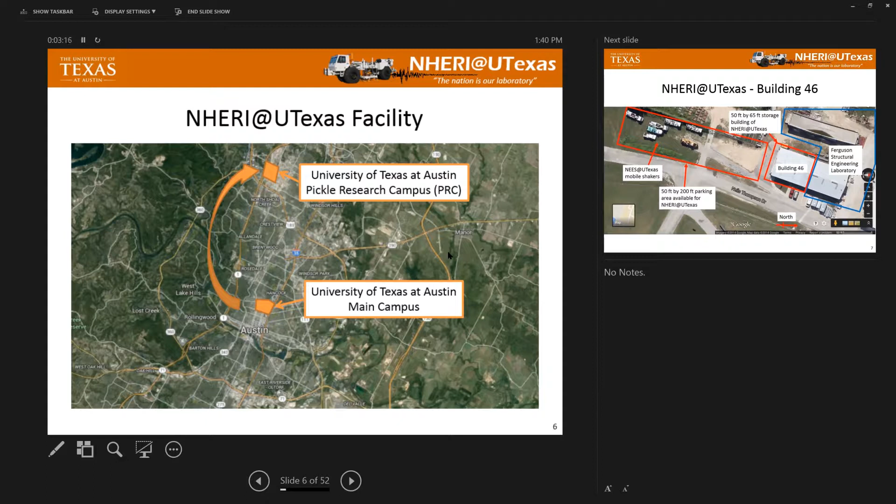Okay, so here we go. This is building 46 out there at the Pickle Research Campus. It's not Heinz Pickles. It's Jake Pickle, who was our congressman. We're here in building 46. We only got half. The structures would only give up half, so we have half of this building. That's where our equipment is located.

If some of it isn't in here, this has been paved and so forth, but we have nice space out there to have field equipment and be able to work with it. And so this is looking into the building. So here, structures was on the other side. We're looking into the building here. You can see that's going to be Thumper, the small one. I don't know which one it is. It's either T-Rex or Liquidator, and we can't see that, but that's the RDD, I think, in there. And this is just with those machines out, and we were building sensors when we went to New Zealand and did testing down there.

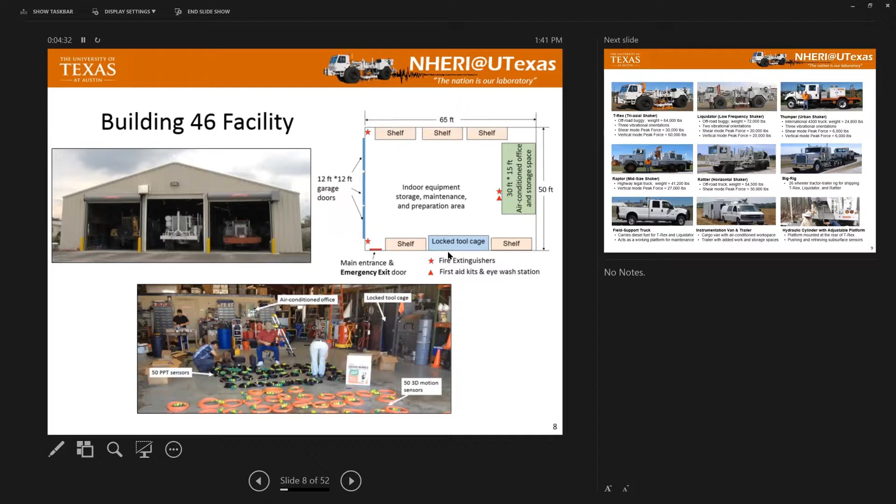And it's really great to have that kind of space. Now, the problem with this space, if you will, is that it's not air conditioned, and we live in Texas. So we have the air conditioned space, that's okay. We have the air conditioned space for the technicians and so forth, and offices, if so to speak.

It's very nice for us, in fact. Okay, so this gives you an idea of what we're looking at here, and we're trying to offer you in terms of capabilities of shaking and mobile shakers, and up to now it has always been just one, but we're working on phasing 2 together.

But here's Tri-Axial T-Rex, a Tri-Axial shaker, so that's what's here. It can go vertically, horizontally, longitudinally along the length of the machine, and horizontally perpendicular to the machine, one at a time. You're flipping between them. It weighs really about 68,000 pounds because of other things we put on the back, but is pretty much one of a kind. We think the others that have been sold to Russia aren't working, so we'll see. Doesn't matter. For you and for anyone else, it's one of a kind.

Liquidator is truly one of a kind. When we started as NEES, Network for Earthquake Engineering Simulation, which lasted for 14 years, 4 years of building, 10 years of operation before this, that was specially designed for us to be a low frequency shaker, because in the earthquake business, you start to try to profile deeply or load things maybe really at low frequencies. This is special, and what's special about it is it has to have a lot of travel to create good loads at low frequencies, and you'll see how we got even bigger loads here in a little bit.

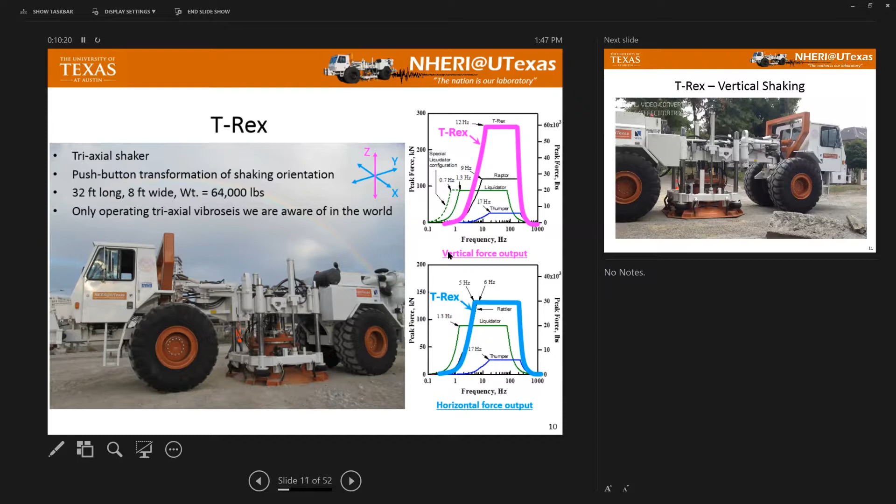And, okay, wait till we get the liquidator. So, this is going to be Professor Cox speaking. Yeah, this is a short video from testing in Christchurch, New Zealand. I don't think our speakers are working, but okay. I can annotate. Remember what you said. We'll talk a little bit more.

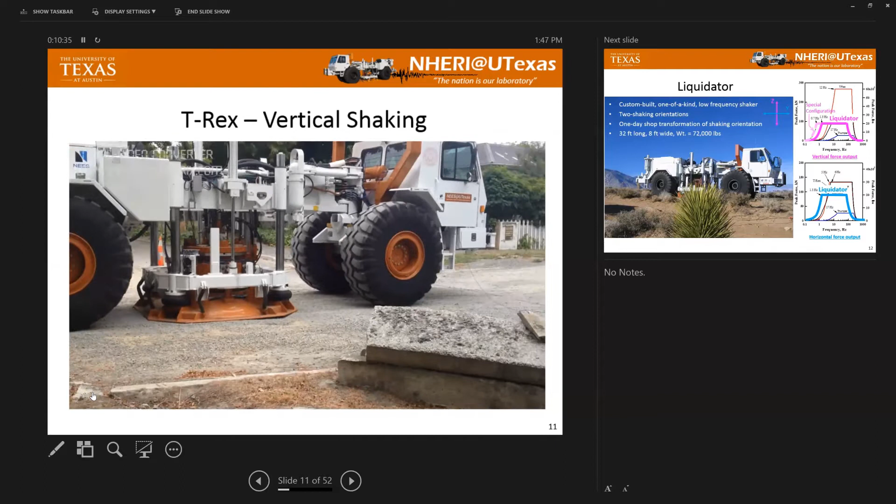We shipped T-Rex down to New Zealand. It's been maybe a couple years ago now to do some testing, deep surface wave profiling, and you can see the vibrations from the truck kind of being carried out into the water at this location. But water on the bridge. Yeah, you'll get to experience this live tomorrow, so we don't need to dwell on that too long.

Okay, then here's liquidator. It's on the top of the other mountain right there. And you see how much lower the force is in the vertical motion. But here is where we have the extension, and that's really important when you start profiling into the ground with surface waves actively. So that's the main reason for this. It's the same in vertical and horizontal because it's got a very large hold down force. So it's really the stroke. In fact, we're going to see it move.

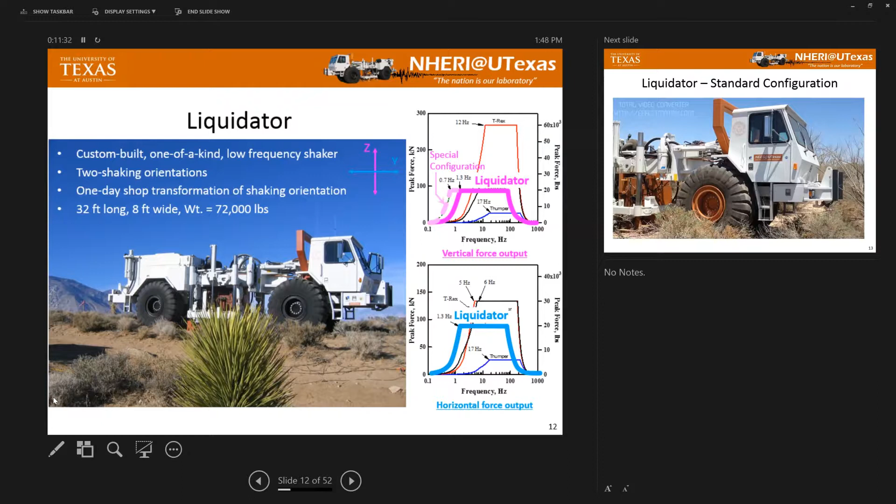So here's that orange mode I should have told you about. There's nothing else that does that. That's a huge shaking motion, but at low frequencies, you've got to have that to get the forces out. The thing I should have told you is everything that's white holds down the orange, and everything that's white is a hold down force. In fact, the hold down force comes through just two hydraulic rams to hold down the base plate of the machine.

So I was after FANU. I think this is a pretty correct statement: we got to get more force, we got to get more force, how are we going to do it? He said, no, those aren't very good ideas. So I think in the middle of the night, one night, I popped up and said, okay, we're going to lift the whole darn machine up and down. And I can say those things, but I can't do it. FANU did. And so now that's 55,000 pounds that you're shaking with.

And we went down to 0.65 hertz. We were all working on a greenfield project in Columbus, Georgia. We had to build a slab on the ground to give us a little more stability than just basically on soil. We put out our sensors, and we did great work. It's just we generated a 2-mile-long wave, and I never thought we could do that, but we were at a pretty stiff site, so we didn't see that part out.

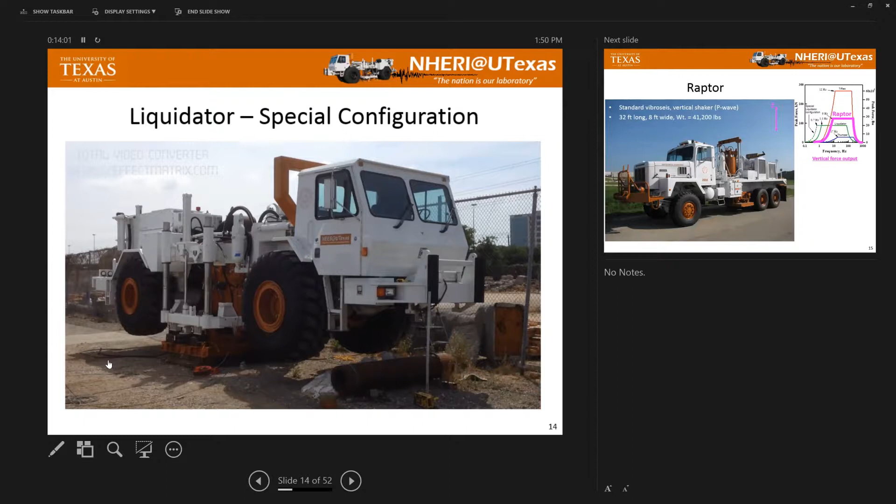But we did an active guide and a passive guide, and we did those together, and it was spectacular. So we went down to at least 2,500 feet with strong resolution and got into about, on average, 9,500 feet per second bedrock on the East Coast with good engineering measurements. That may be the first time that's ever been done. So we're very pleased. We hope we can get into the National Science Foundation's pocketbook as well, but we'll see what happens.

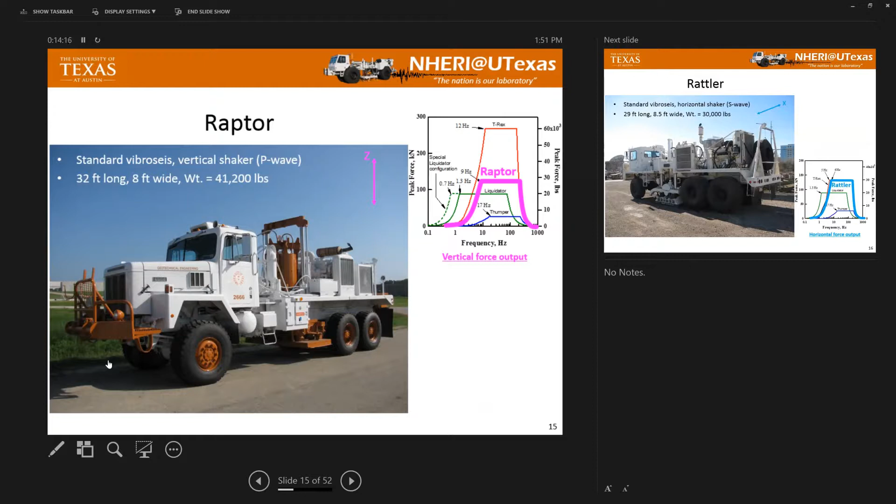So here's Raptor. Raptor is a little smaller, it's a vertical one, but it can be phased with T-Rex. Next one is Rattler, it's a little smaller, shaking this way, and it can be phased. We have a project in liquefaction, and FANU has already had Raptor and T-Rex out phased together. Now we can phase them, not in sync, but at angles. That doubled our amplitude, and that's huge. When you get to near liquefaction - we haven't gotten near liquefaction - but that should have a really big impact on our project.

So we'll be doing that testing next spring to summertime.

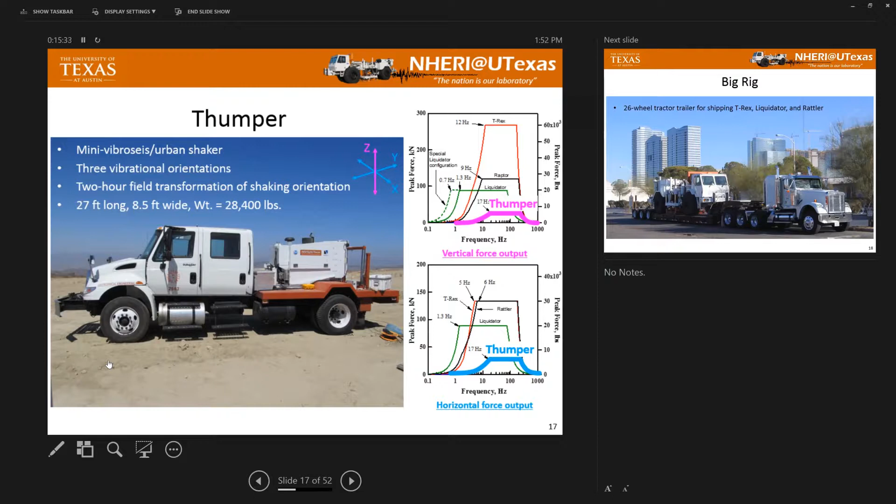There's a big rig in action. Now that's our field truck, but with the fuel ability to supply fuel, that would be a typical trailer. We have a little bit - is it the same size as you? Yes, okay, same size trailer, but a more robust undercarriage, so we don't blow so many tires going down the road because it's full of stuff. The back is dirty, the front is air conditioned, and so the instrumentation is in there.

In fact, you're going to see a guy sitting there, and maybe in a minute, see if you can identify that person. Oh, you were too fast. Good, no introduction. I wanted to do the other one. Yeah, there's a cargo van in the smaller trailer. Yeah, okay.

Your hair looks a lot redder today. I had more hair, and it was darker. Is that what red hair like this does? I guess so, yeah. Okay, I don't know.

I'm going to quickly talk about our instrumentation. Our data acquisition systems - we have a 72-channel VXI system, 24-bit dynamic signal analyzers, up to 50 kilohertz simultaneous sampling rates, not multiplexed. This one's a bit older, we don't use it as much. We brought it here in case we needed it, but mostly we use the 64-channel data physics system, again a dynamic signal analyzer, 24 bits, with up to 200 kilohertz simultaneous sampling rates, no multiplexing.

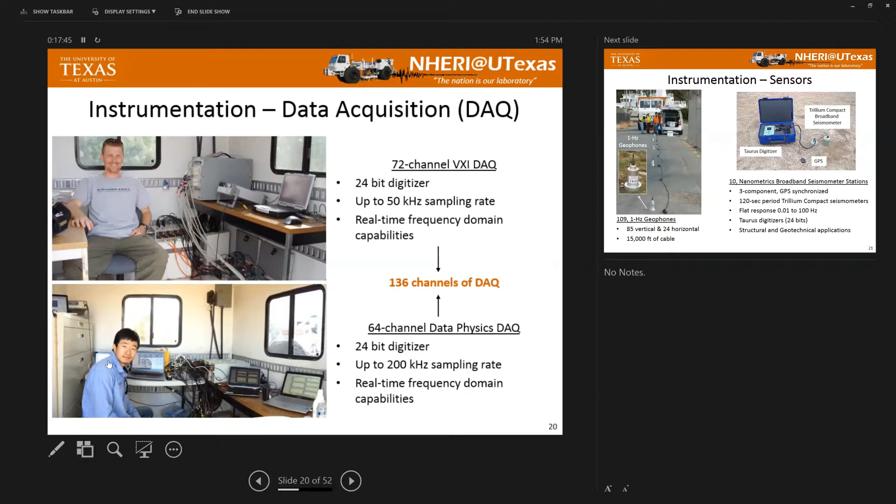In terms of instrumentation, coming from the geotech world, a lot of our instrumentation are velocity transducers in one form or another. We have 109 1-hertz geophones, 85 vertical and 24 horizontal, and over 15,000 feet of cable to string these around. This is using these 1-hertz geophones, again in New Zealand, for MASW - multi-channel analysis of surface wave testing.

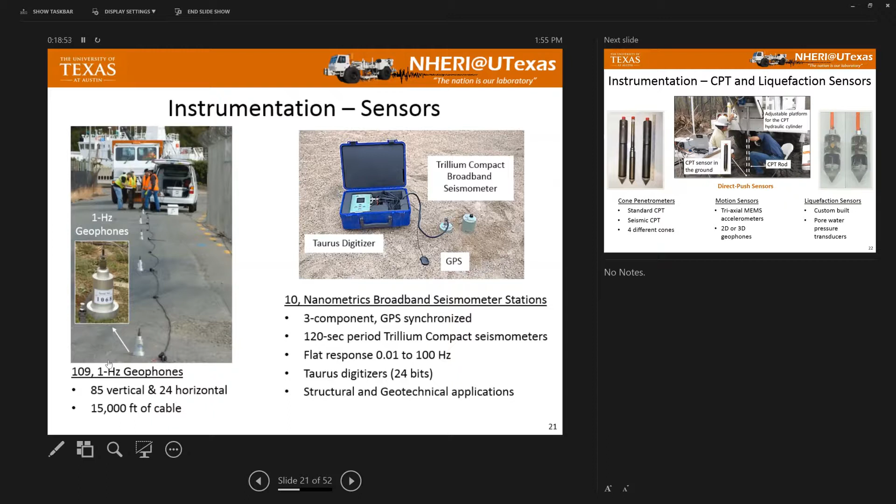We also have 10 Nanometrics broadband seismometers. We record active vibrations with these, but mostly they're used for recording ambient vibrations. Each box costs almost $20,000. They're extremely sensitive, with a flat response from 120-second period clear up to 100 hertz, and again there are 3 components, very good digitizers. We use these on a lot of different projects, and we've used them here - we'll show some data from those later.

In terms of subsurface instrumentation, we have standard cone penetrometer probes that we can push into the ground to do seismic CPT or regular CPT. We also have our own sensors that we fabricate a lot, which hook to rods and get pushed into the ground, oftentimes decoupled from the rods so we can pull the rods out and leave the sensors in the ground.

One thing we want to make clear for those thinking about using our site: if we don't have the sensors you need, there are additional instrumentation resources from IRIS PASSCAL, an NSF-funded center housed in New Mexico. For example, here are some of their Kinemetrics EpiSensors, a very common tri-axial accelerometer used for a lot of structural testing, at least in the earthquake engineering field.

Have mobile shakers, will travel - that's kind of our motto.

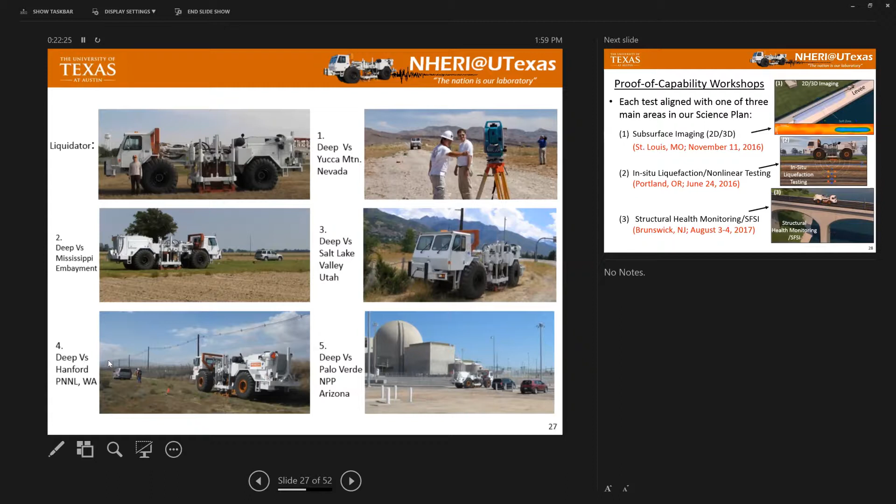You should realize we're not fully funded. The National Science Foundation doesn't give us 100% funding for all the people you saw there. So we have to take other jobs through the university to help pay for our technicians and also give us program income. We use the word profit, but at a public university we can't use that word, though that's what keeps us going. So when you see things like that, don't get the idea we're out there consulting, because that isn't true at all, and sometimes it can be misleading.

When we applied for NHERI, when the NEES program was dissolved, we had to come up with a science plan discussing our vision for using this equipment in the future, and why NSF should fund our site. These are three things we planned in our science plan years ago, and lo and behold, if you plan it, it will come to pass with some hard work and help from good friends who help you achieve it. We planned our science plan around subsurface imaging, in situ nonlinear testing of soils, and structural health monitoring and soil-foundation-structure interaction.

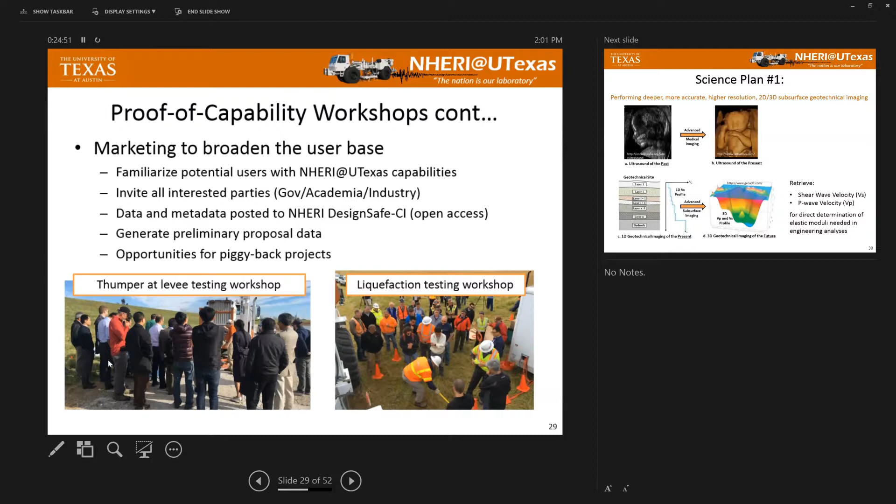For science plan number one, our vision was to perform deeper, more accurate, higher resolution 2D and 3D subsurface imaging, geotechnical imaging—thinking about the ultrasounds of the past and the advancements made in medical imaging.

You can now go to the mall for this. I have four daughters, I've been through this four times. Is that one of them you used up there? That one's not mine, I think. You never mentioned that before. I didn't know whose child this is. I apologize if you're out there and didn't intend that use, but you can check out 3dbaby.com.

So we need to do the same thing with geotechnical imaging. Currently we're pretty much living in a 1D world—we go out, drill a borehole, push a cone, or get a shear wave velocity profile, and it's one-dimensional almost always. What we want to do is extend that to two and three dimensions, with quantification of uncertainties. This is the future, and we have to figure out how to get there—not just image below the surface, but retrieve moduli: constrained moduli, shear moduli.

Right now in the liquefaction field, 3D imaging is a hot topic—you might ask why this area shouldn't have liquefied but did, or vice versa. It's really the 3D characteristics of the subsurface in that area that dominate what happens, and we haven't paid enough attention to that before. We need to do a better job of that.

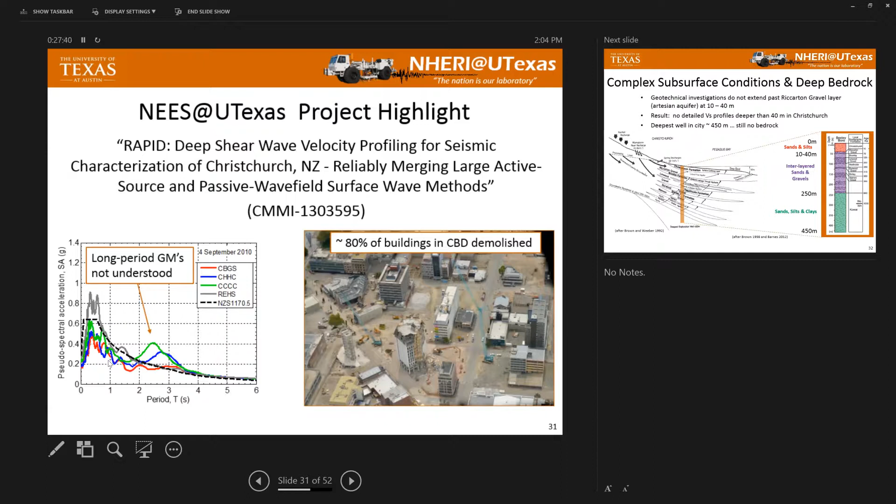So we went down there to investigate the cause of the really long period ground motions. We were trying to determine the subsurface stiffness down to bedrock. They didn't know where bedrock was. They had one borehole in the city that went down to 450 meters, and they were still in sand, silts, and clays at 450 meters—not feet, meters. So we went down there to see if we could develop some non-intrusive stiffness measurements clear down to bedrock, so that we could propagate earthquake waves numerically from bedrock up to the surface to help predict some of the destruction that happened.

And we took T-Rex down there. This was in February 2013. The time goes by fast.

We can move these things around. If you want to do a project in Italy, we'll go to Italy—just get the funding, we'll be there. But seriously, we can move around, and it wasn't even as expensive as you might think. Let's say $70,000 to ship it there. 85? No, 60. New Zealand? Monk says 60, I said 70. You get the picture—it's not that bad.

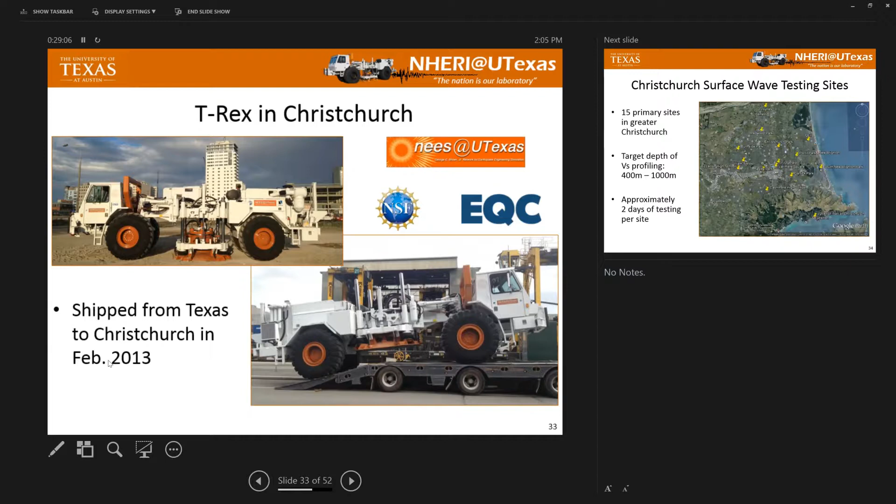We tested at 15 sites around the city, doing deep surface wave testing. We were trying to profile about 1,000 meters deep, not just with active testing using T-Rex, but also using ambient vibration arrays where we deploy broadband seismometers in circles. We would set out a linear array of geophones and shake with T-Rex in different locations, then also deploy circular arrays and record ambient vibration, piecing that information together.

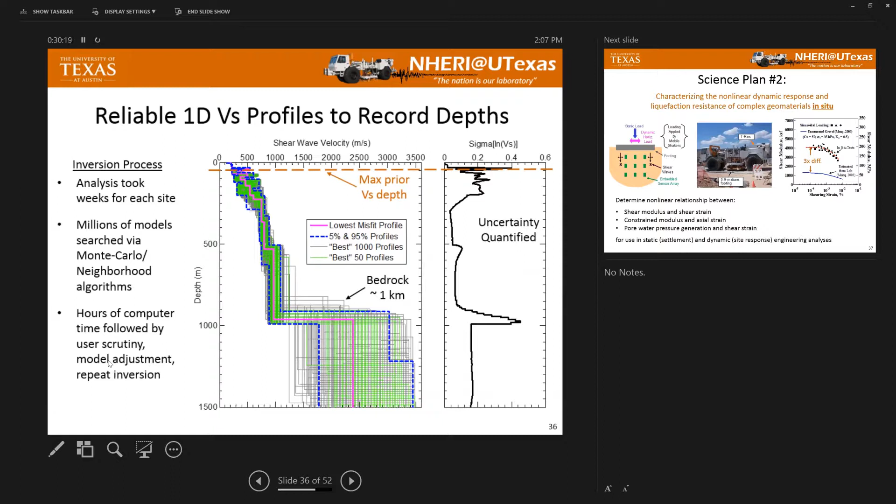Based on dispersion processing and inversions of that data, which is more than we want to get into now, we were able to identify the depth of bedrock at about 1 kilometer below the surface, with uncertainty estimates on the stiffness of the rock as well as on all the alternating gravel and sand soil layers. Before our work, the maximum prior depth of the shear wave velocity profile in Christchurch was about 30 to 40 meters, so we significantly extended that through our work in Christchurch.

Science plan number 2—Professor Stokoe is going to take over. No problem, thank you, sir. So Brady and his students did all that deep profiling. They did a great job.

In the desert material, you'd just have motion sensors because no pore pressure is generated. In the liquefaction case, you'd also have pore pressure transducers down here, with generated shear waves going down. This shows shear modulus versus shearing strain—nonlinear—you see a linear region and then a nonlinear region. Even though one person got his PhD degree for this, he was way off with his laboratory tests. It turned out this material's data were such that the Bechtel designers were overjoyed, because they used these for settlement analyses—it didn't go nonlinear, so they could use it even in the elastic range, and it got past.

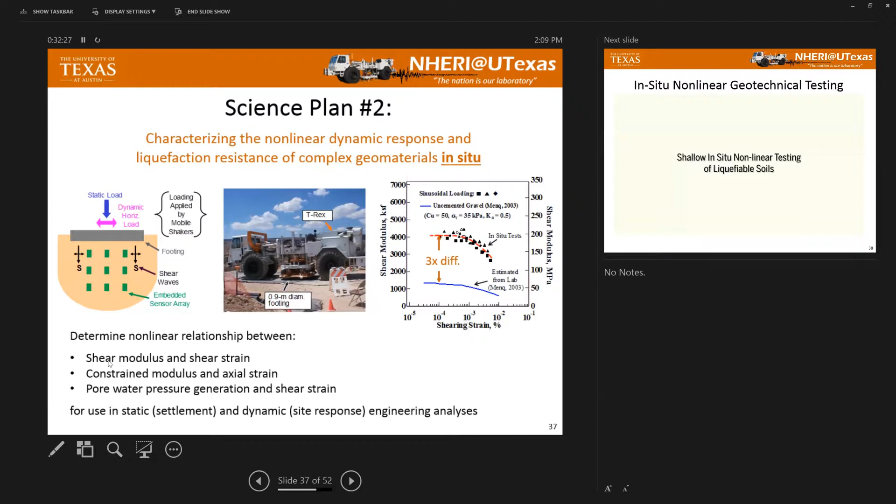Can I say something for people asking me questions? The in situ material is cemented—that's why I didn't predict it. That's right, when you ran it in the lab, you didn't have cementation. Correct. You want to join them and have three young people against old guys? I'm sure you'd get it right in the lab. Stress the importance of in situ testing. I'm not retiring, it doesn't matter.

So we have a lot of fun doing this, but it's really nice when it has a good impact too, and you learn a lot. This is the liquefaction testing in Christchurch, and no matter what it cost, the Earthquake Commission really supported us well. So there we go—given the different numbers, the Earthquake Commission did a great job.

This is just a little animation. That's a pore pressure transducer, showing liquefaction and nonlinear measurement. That's on the back, the RAM on the back of T-Rex there. We install the instrumentation, then shake the ground and watch these nonlinear waves propagate.

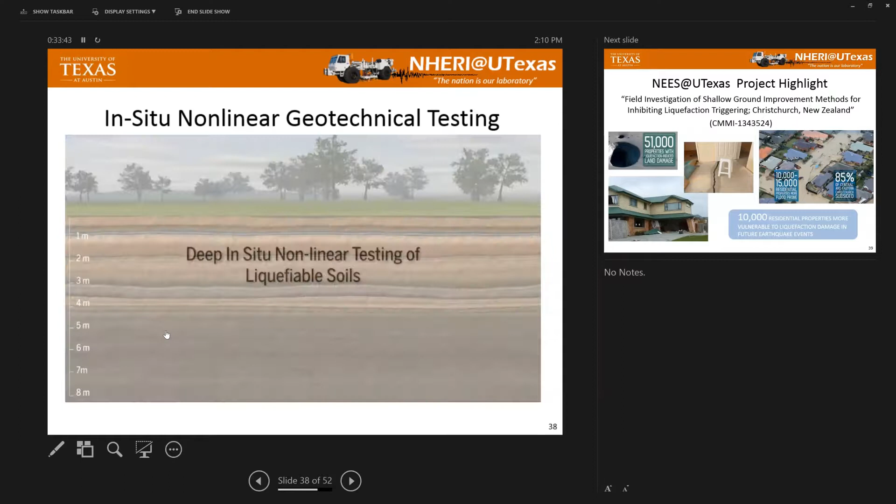You see velocity, we'll change that into displacement. So we got the frequency, and that was the pore pressure. This one is to do deeper nonlinear tests, even though... okay, there we go.

We did this on a project that our dean had. Sharon Wood was the chair of our project then, but she had a project with NSF. We used a drill shaft, quarter scale for bridge bent, about that big diameter. We put sensors in there, and you could generate a very good generator of shear waves away from that and determine the nonlinearity in the materials.

You want to talk more about the Christchurch? No problem, doesn't matter to me.

In Christchurch, the central business district was basically destroyed, 80% had to be demolished. With homes, it was huge. The difference there is that the property, the ground, was also insured as well as the building, so their insurance said the ground would be brought back to before-earthquake conditions. They had 51,000 properties affected.

You can see that's the water, right after the earthquake, and that's all the sand ejected in the water. I think it's even bigger than this, let's just say 20,000. Now homes are more flood prone because the surface went down about a meter, in general, and it is more than that. Residential properties that have to be demolished, more than 10,000.

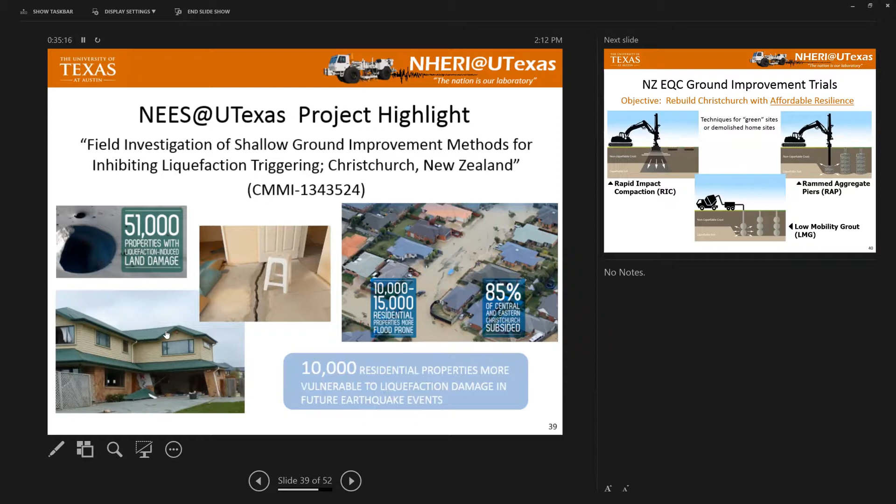You're looking at things like this, it was quite devastating. We helped with T-Rex to look at ground improvements. They looked at compaction, but just very localized, so rapid impact compaction. They looked at building rammed aggregate piers, pushing or pounding the aggregate into the ground, building up horizontal stresses, trying to densify.

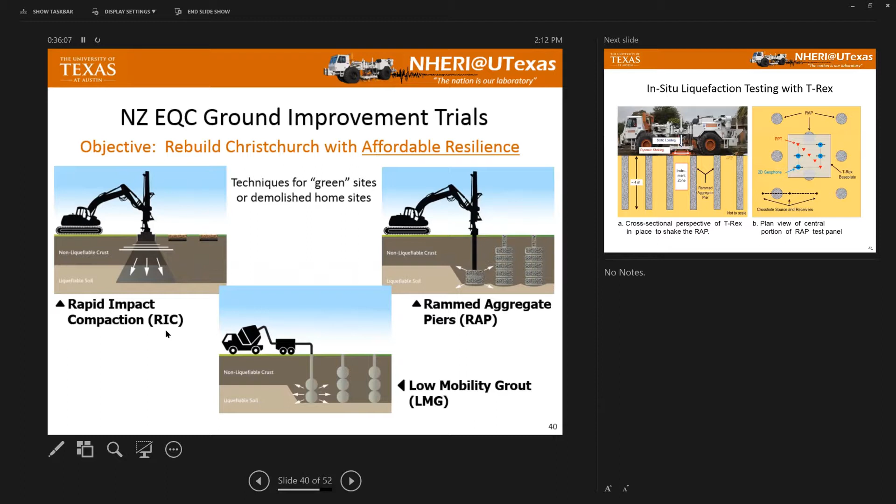They also looked at low mobility grout. The key point here was they were trying to build, to get the ground back to what it was, a 3 meter to 4 meter thick crust on the surface that the structures could sort of sit on, like a raft, so to speak, and would perform better during future earthquakes. That was the basic idea.

By the way, we also did crosshole, direct push crosshole tests off to the side to characterize the ground after the improvement versus characterizing the natural soil and other test panels that had nothing done there.

We may not have the sound here. Okay, so he's saying what the problem is. EQC was very supportive of us and very pleased with everything in the end.

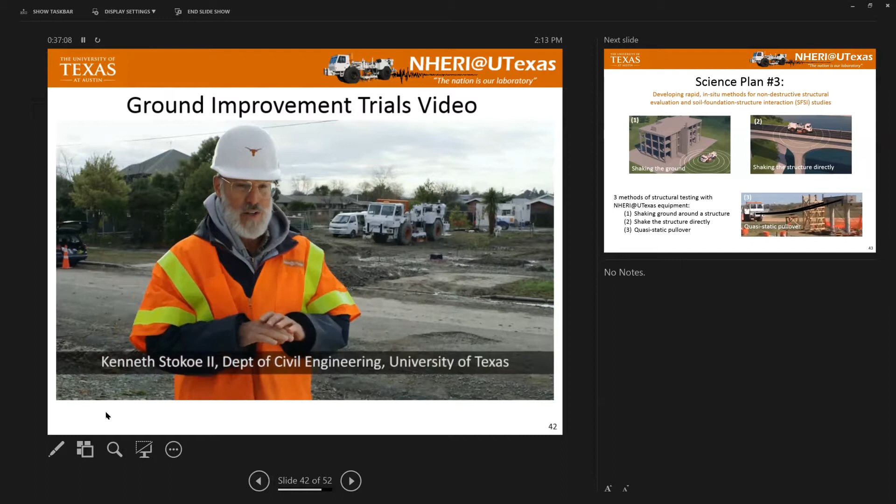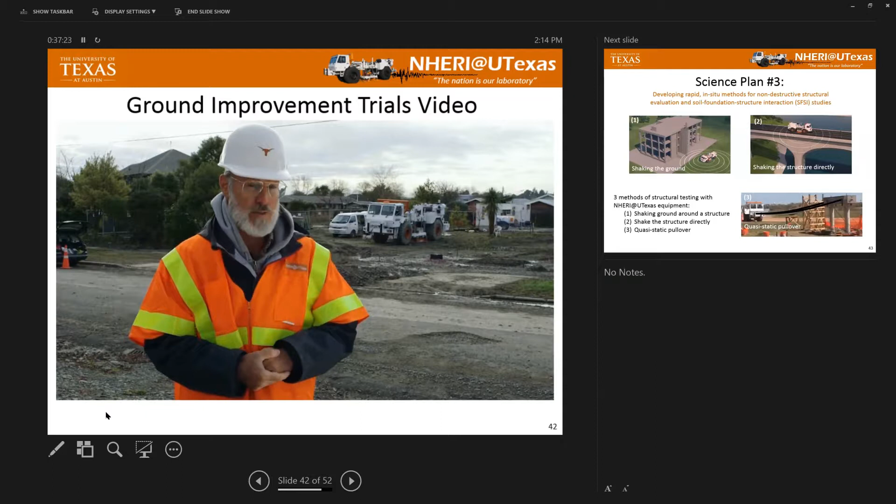We're at site, doesn't matter, I think we're at site 3. We've got this instrumentation all on the ground, it takes quite a while. Then we'll put T-Rex on top. It'll shake, watch right here. It'll shake. Oh, it's a go-by.

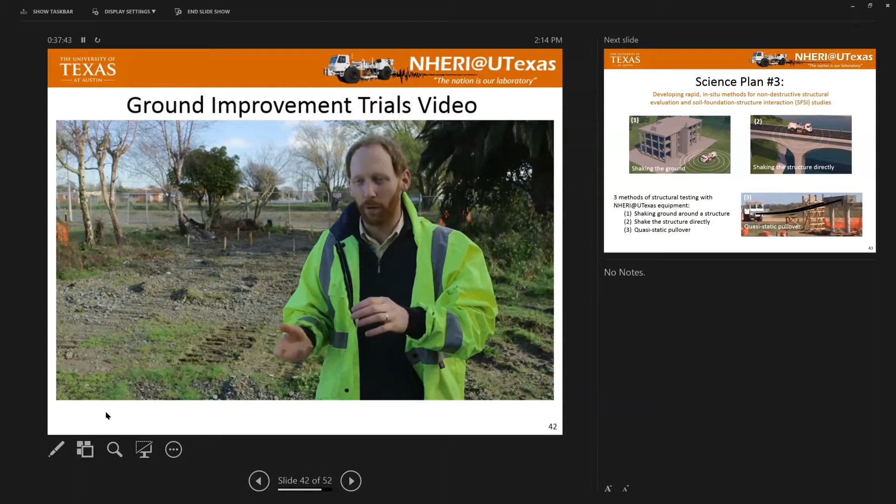Well, no, that was at the surface. That didn't count, but that's okay. We needed it deeper than that. But they were very pleased.

Professor Stokoe, which one of the ground improvement techniques showed better performance? The rammed aggregate piers did the better, and with Brady, you can help me here if I say something wrong. The low mobility grouts were the only ones in the code that could be used for this, and when we did our test, we knew they were no good, they were the worst ones. Now, let me be very careful: the way they were installed was not good, and they made it looser than before the earthquake because of lifting the surface, resetting it.

Okay, so now moving on to the third aspect of our science plan. This is developing rapid in situ methods for non-destructive structural evaluation and soil foundation structure interaction. So that's kind of what we're here to see some examples of today.

First, I wanted to give you a broad range of how the shakers can be used in structural testing. One approach is you can just shake the ground around the structure. There are trucks that can drive around and excite the structure by sending waves through the ground. Another way is to shake the structure directly. If it's a bridge or a parking structure, something you can drive on, we can move the trucks directly onto the structure to shake it.

I'll also note that all of the shakers on these trucks are designed so that they could be removed from the truck, and you could attach it or anchor it to the structure. You could attach the shakers to the structures, and just have the truck off to the side as the hydraulic power supply for the shakers. So we'll actually see an example of one of our shakers being removed and attached directly to a structure.

But we should also note that in the field, things aren't as nice as they are in the lab. In the lab, we often idealize foundations, with pristine conditions, construction, and materials. In reality, you have complex soils. Even for sites where you have soil boxes for testing, oftentimes it's uniform soil, but in the real world we may not have uniform soils. You have aging effects, corrosion, scour in your foundations, degradation - things that maybe you could try to simulate in the lab, but it's sometimes very difficult, and this is what's out in the field.

So I think it's really important to have NHERI capabilities that can actually go out into the field and measure structural behavior that accounts for these non-idealized conditions that are actually out there.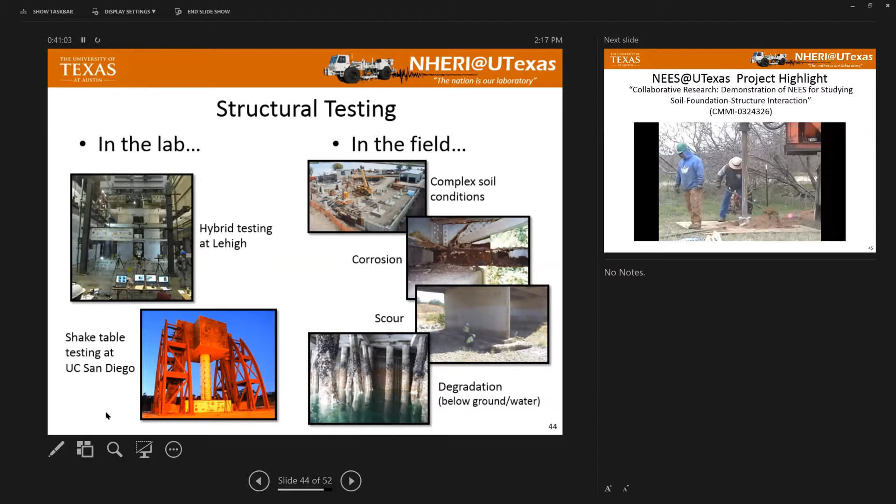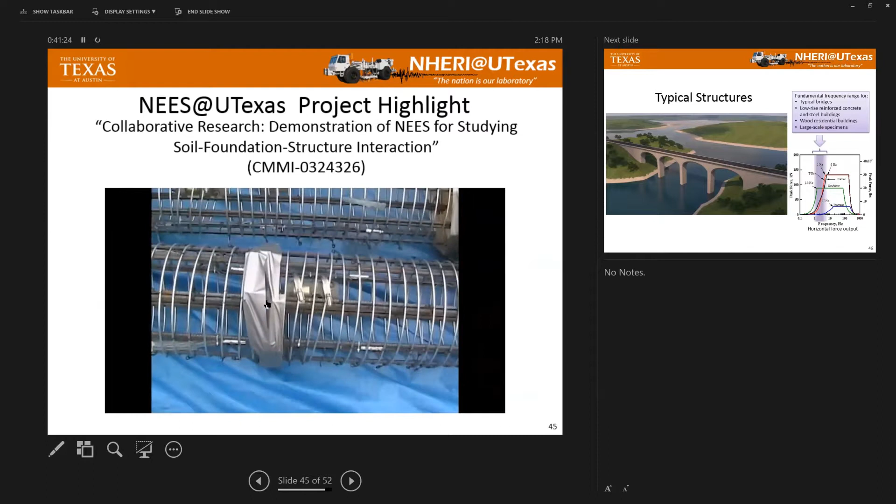Now this is an example project - we're going to start a video here. This is a project done by Sharon Wood, one of our senior personnel, back in the early days of NEES; it's kind of a demonstration project. They actually built approximately quarter-scale bridge bents out in the field using conventional construction methods. Here's the drill shaft piles, fully instrumented with strain gauges and geophones as we're constructing them. I think this was in a clayey type soil.

So even if you can't find a structure that's out there in service that you want to test, you can build your own specimen, and it's large scale out in the field.

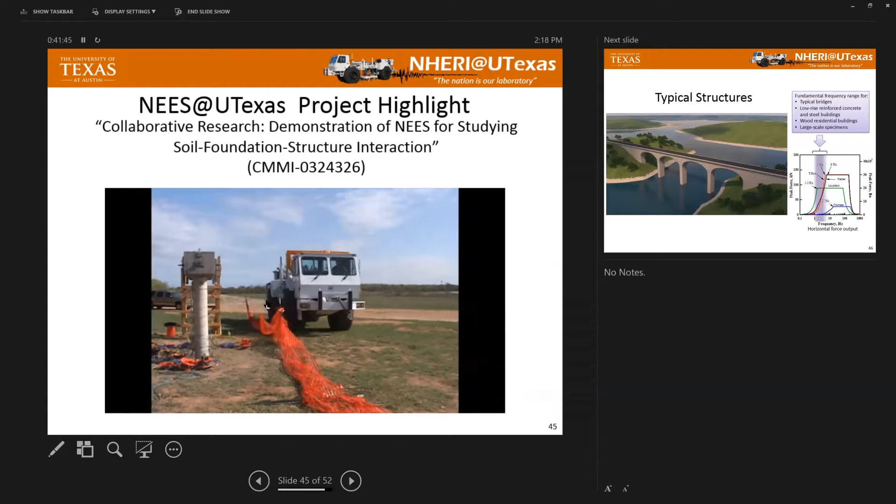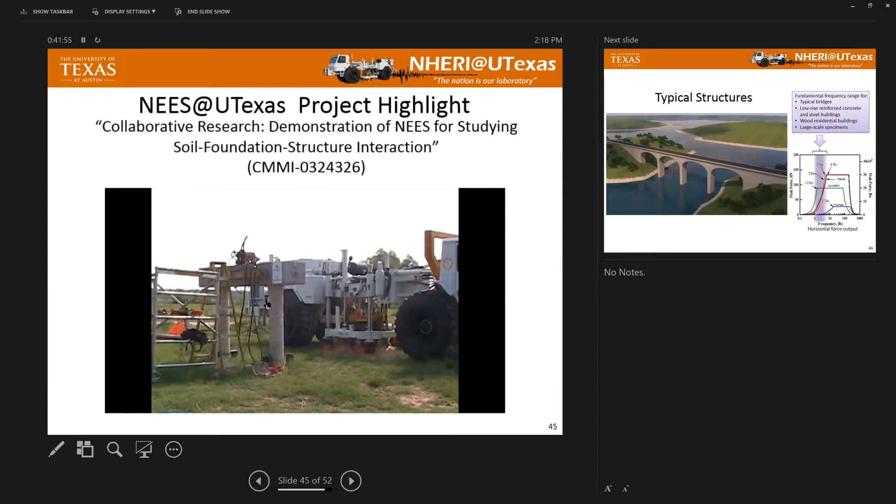Here's our example of T-Rex actually coming and shaking the ground around the structure. We can shake in multiple directions. First we're going to see vertical shaking, across a whole range of frequencies, and then we'll see some horizontal shaking here in a second, at a much lower frequency. T-Rex can move around to multiple locations, collecting dynamic response data from our bridge bents.

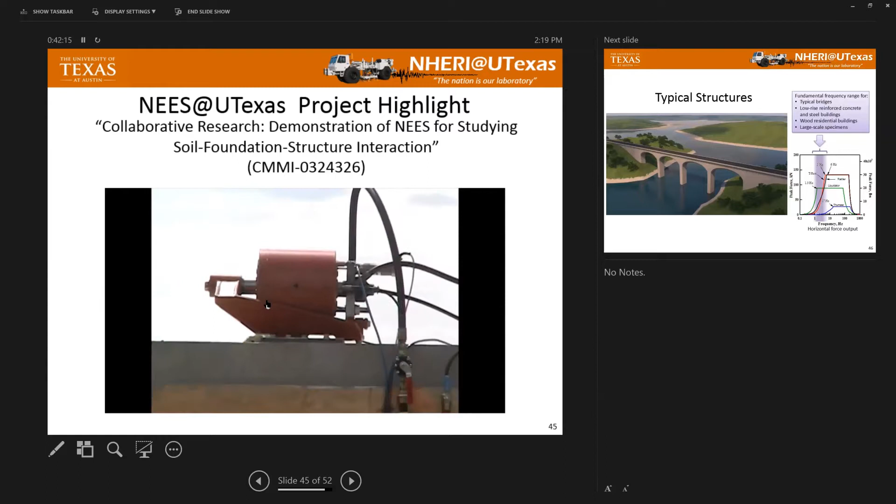This example is actually a thumper shaker - a shaker mounted on a thumper that was removed from the truck and attached to an anchor plate on the bridge bent. This is our smallest shaker, with very small force. Even with that small force, when shaking at the fundamental frequency, you can see pretty large nonlinear behavior - nonlinear gapping in the soil. I don't think you can see cracking, but I think there was some cracking observed afterwards in the drill shafts.

And now we're moving on to our pullover test. Here we have T-Rex - one of the trucks - with a cable attached. There's a load cell there, so we're measuring force as we pull. We use our own instrumentation - LVDTs, inclinometers, and other sensors - to measure displacements, just like you would in the lab, but now you're actually measuring it in the field with real foundation fixity conditions.

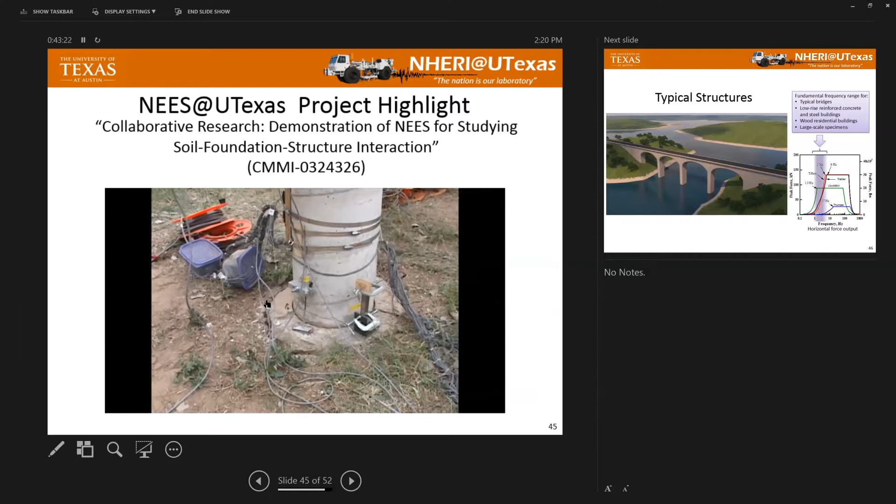You can see the nonlinearity of the soil. There's actually hinging in that drill shaft just below the soil line. That's a drill shaft that we shook, a separate one, but the same size, when you saw the deeper loading.

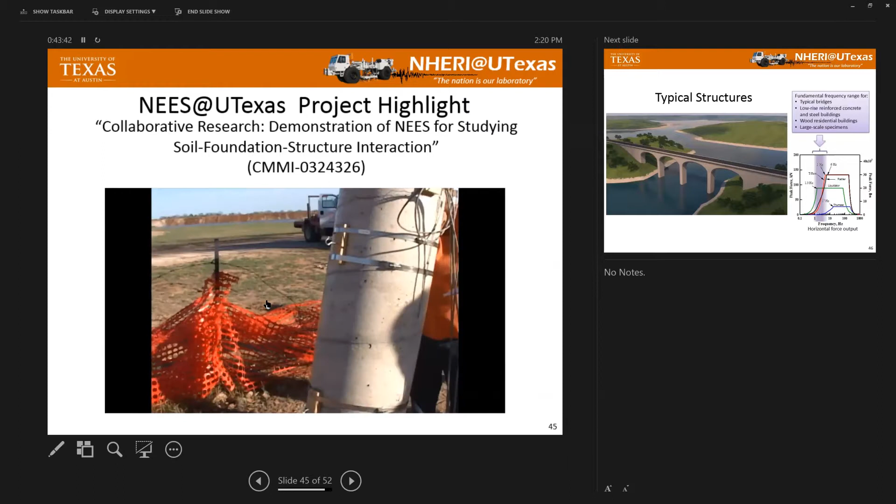Here we're doing the same thing to our taller bridge bent specimen, pulling very large deformations and getting good measurements. You actually see the concrete falling. Who doesn't like that as a structural engineer? We like the gap, and the soil people like to look at what's going on down here.

I like to see a nice plastic hinge where the bars are buckling and fracturing up at the top hinge of the column. And like I said before, they actually excavated around the foundation after the test and saw that hinging below the soil line at the drill shaft.

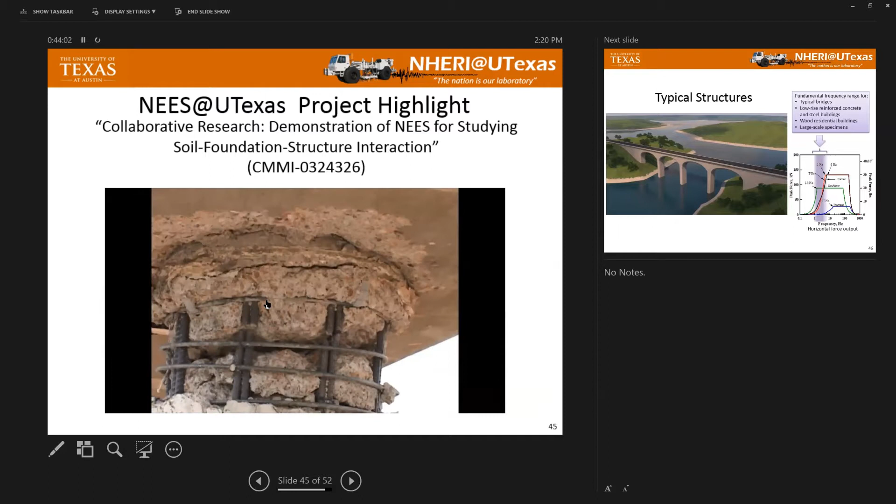What we were also able to do here is pull all the way to collapse. You probably wouldn't want to do that in a laboratory with an actuator, because you might damage it, but we can actually pull this thing and haul it down the street.

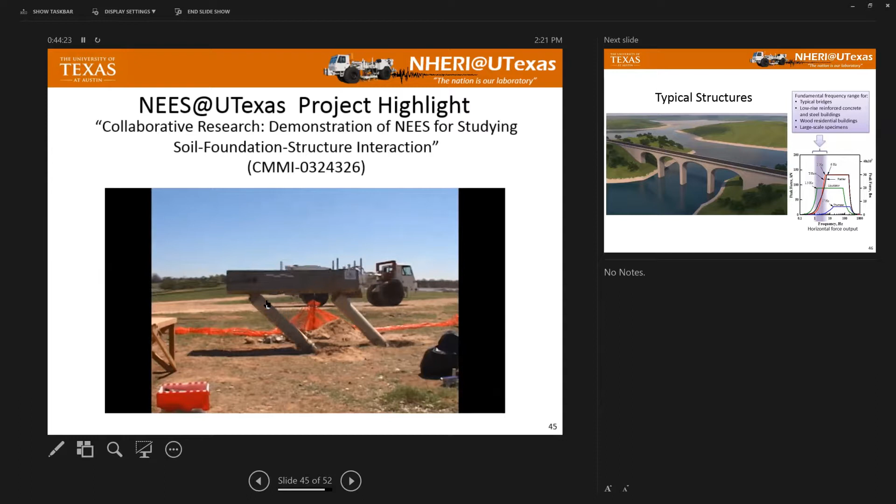So that's for shaking the ground, but what about for the cables? It's not a cable, it's a weight. When the truck starts, that's for friction.

Hysteresis loops - we had T-Rex on one side, liquidator on the other, just pulling the bent back and forth. Yeah, it worked very well. And load cells, of course.

Is there any way to test offshore structures? If you can get the truck there, you can shake it - depends on how much money you have. In theory, yes, you can drive it on a Ro-Ro boat. If it's a big enough structure, you can shake it.

You could take the shaker by helicopter and attach it to the offshore structure, shake it, then detach the shaker so you don't need to stay. The truck is the hydraulic power supply, so you still need the truck or another pump to provide that hydraulic power on site, with hoses. They may very well have pumps on site already. So logistically, as long as you can figure out how to make it happen, there's nothing that says these shakers can't be used on offshore structures.

This gives you an idea of typical structures. The trucks were originally designed for geotechnical testing, so they have a lot more horsepower for high frequency ranges, usually higher than our structures need relative to the soil. But even at lower frequencies, like typical overpass bridges, low-rise buildings, residential buildings - a huge portion of the building stock - and large-scale specimens, we can shake in this frequency range.

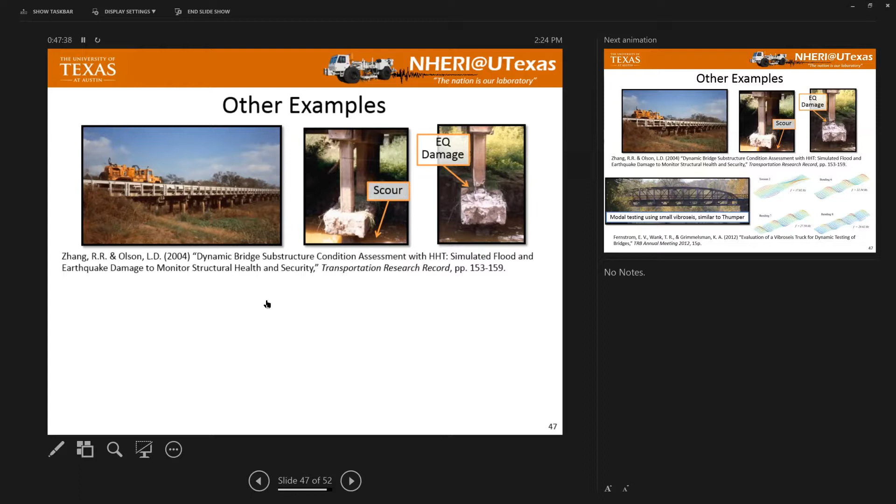Decommissioned structures are great for that reason. Here the piers being tested actually had soil excavated to simulate scour, so you can test the structure at different levels of scour. They also went in with jackhammers to simulate different levels of earthquake damage. So this is another great option if you don't want to build your own specimen - use a decommissioned structure.

You can also use in-service structures. This is an example from Kirk Grimmelsman, who's not here but is supposed to be. He did some testing using a small shaker, similar to Thumper, at the University of Arkansas - that was your shaker, right, Brady? Yeah, he was looking at dynamic testing of bridges, evaluation and load rating, condition assessment, and things like the mesh density of sensors on a bridge.

So we can test in-service bridges, again just like the example we're going to see today, and we'll put you out into the field to see tomorrow.

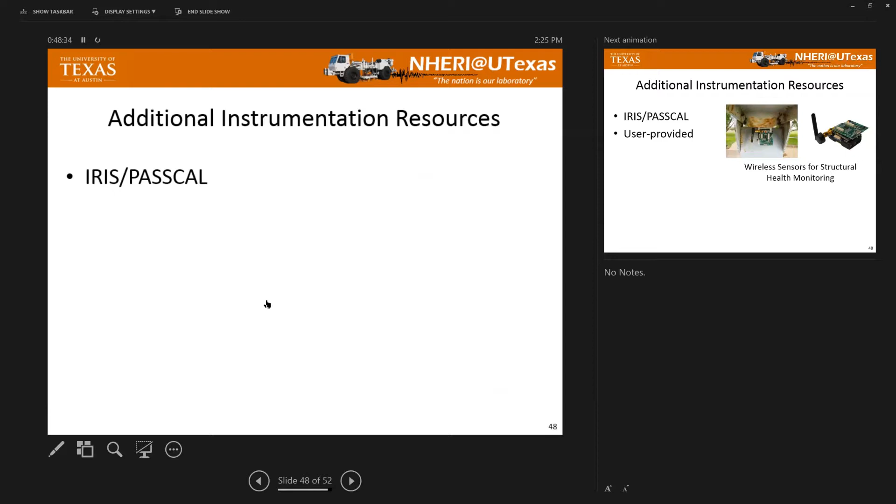As far as instrumentation goes, we have lots of geophones, a fair number of seismometers and accelerometers. If you want more than that, PASSCAL can provide similar sensors for free for NSF funding, minus travel and shipping costs. We also encourage you to use your own sensors if you have them, maybe sensors you've developed in your lab for structural health monitoring, or instrumentation like LVDTs and inclinometers. We can typically feed those into our data acquisition system, or you can bring your own data acquisition to the field. We're very flexible and will work with you to make sure everything is instrumented.

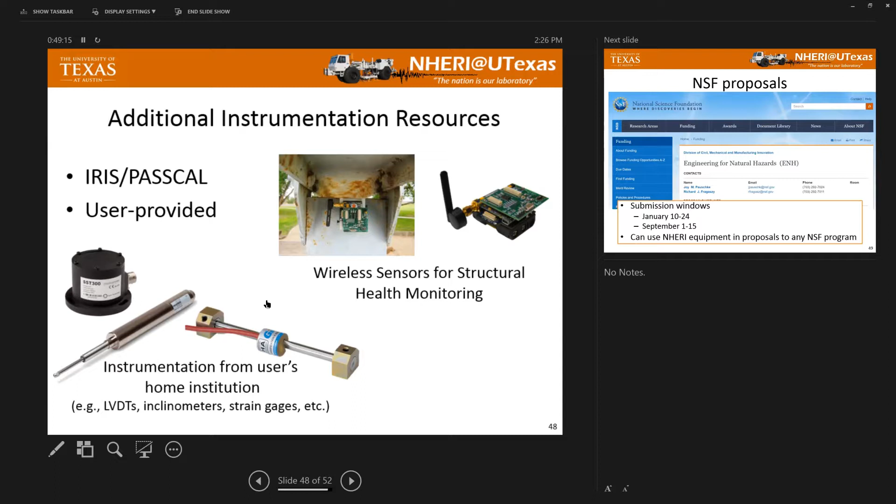Let's see, you want me to talk about proposals? So I think several of you here, faculty or future faculty, might be interested in using these trucks. We are an NSF funded site, so it comes at a much lower cost if you want to use this on NSF funded projects.

For NSF proposals, most commonly Engineering for Natural Hazards is a newer program, and much of the research we do typically falls under this program. There are submission windows, and they've changed a little bit—now there's one in mid-January and one in September. Those are the two times you can submit proposals. But I want to stress that if you submit to any NSF program, not just Engineering for Natural Hazards, you can still use the NHERI shaker trucks for the reduced NSF cost.

To talk about our reduced costs, we have a budget worksheet posted on DesignSafe—it's a little too small to read here, so please go to DesignSafe if you want to see more details. But essentially, if you're using the shaker trucks for an NSF funded project, all you need to pay for is fuel for the trucks, shipment of the trucks to the site, and travel for personnel. There are no user fees for the equipment.

For this example, the spreadsheet posted on DesignSafe lets you play around with the numbers. In this case, T-Rex going out 1,000 miles away from Texas, shipped to the field for 16 days, came out to about $22,000.

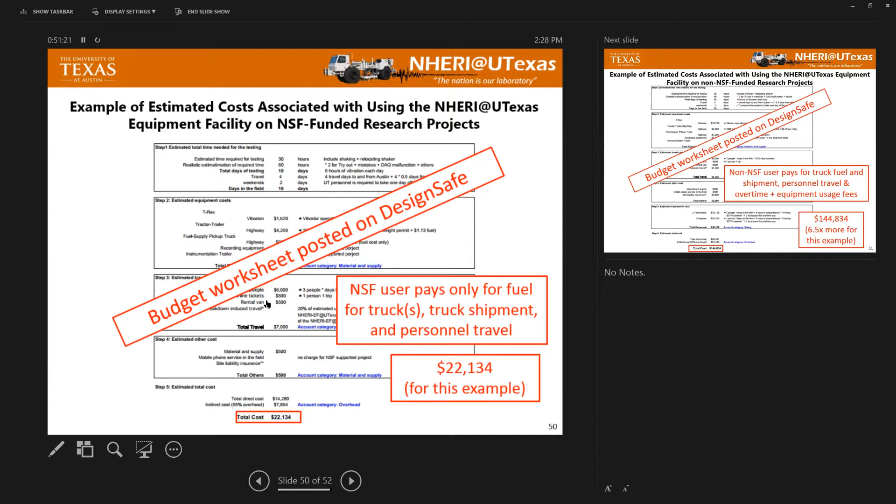But to contrast that with a non-NSF funded project: same example, 1,000 miles away, 16 days in the field for T-Rex. Now you have to pay additional personnel, overtime fees, and equipment usage fees, and for that same project it comes out to 6.5 times more than if you're on an NSF funded project. We're also happy to talk with you if you want to use the trucks for a non-NSF funded project, but you definitely get a lot better bang for your buck if you're proposing NSF.

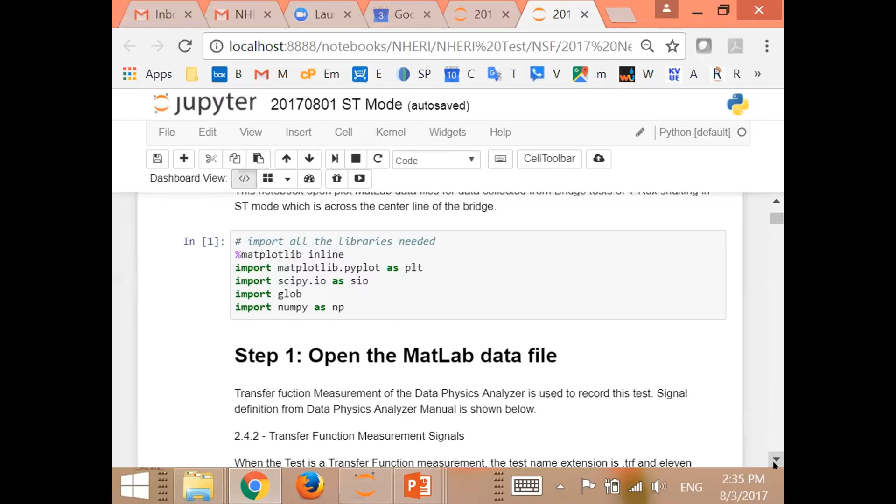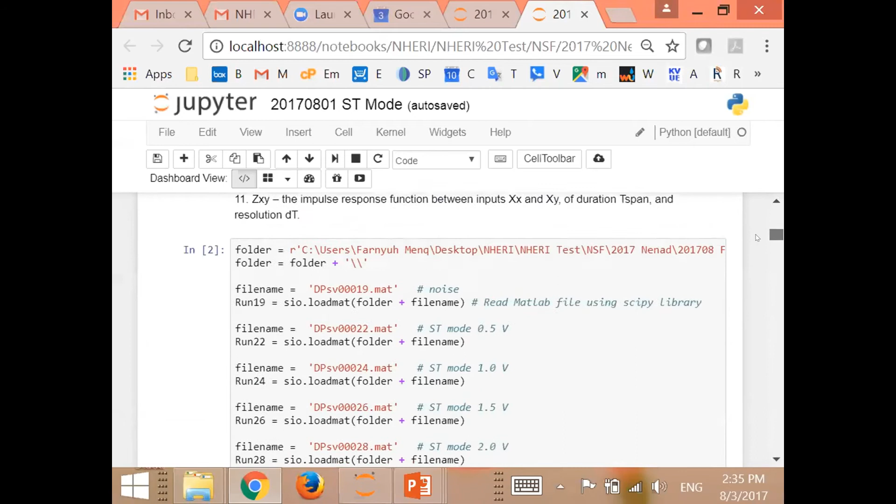So when I give it to Nenad, you will see this. The first column here defines the folder, the name of the folder. This is where I put my data. So once I give Nenad, all they had to change is just the folder name. Everything else is the same. You can run the whole thing and you'll get the same plot that I get. That's how it looks, basically.

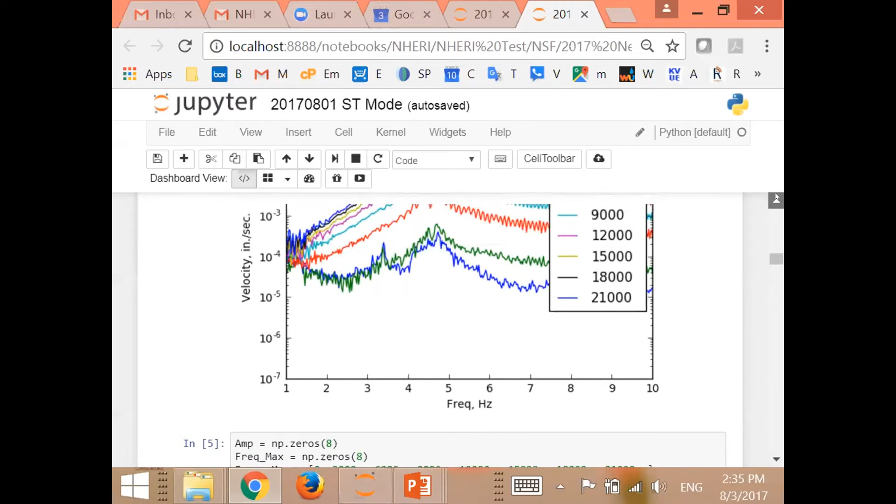Post the raw data on Design Safe? Yes, on Design Safe the PI will post the raw data in various forms of the processed data. Eventually the PI will post that, and they're encouraging people to post their scripts, their data processing scripts.

So obviously you put a lot of work into developing your processing codes and scripts. This happens to be an example of a Jupyter Notebook where others can come in and evaluate your scripts and look at what you did. It's another form of peer review, being able to look into the guts of how you process data, and they're encouraging that. But you have control as a user of how much you want to share your processing scripts.

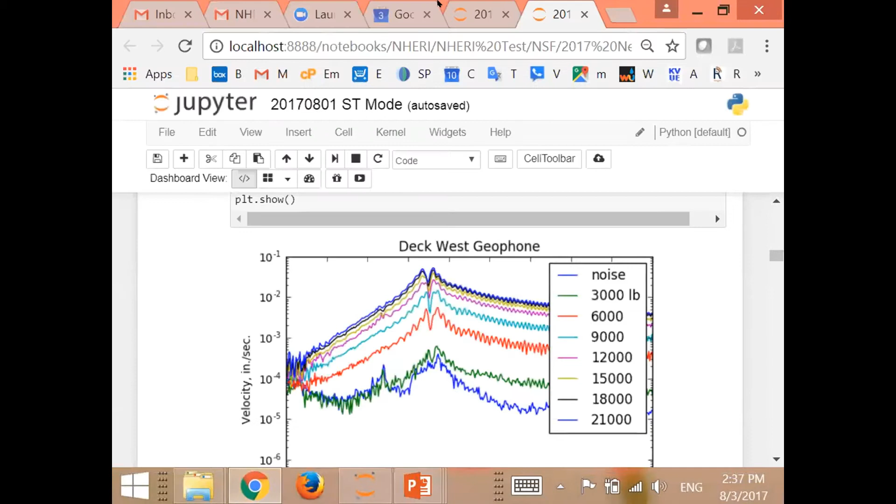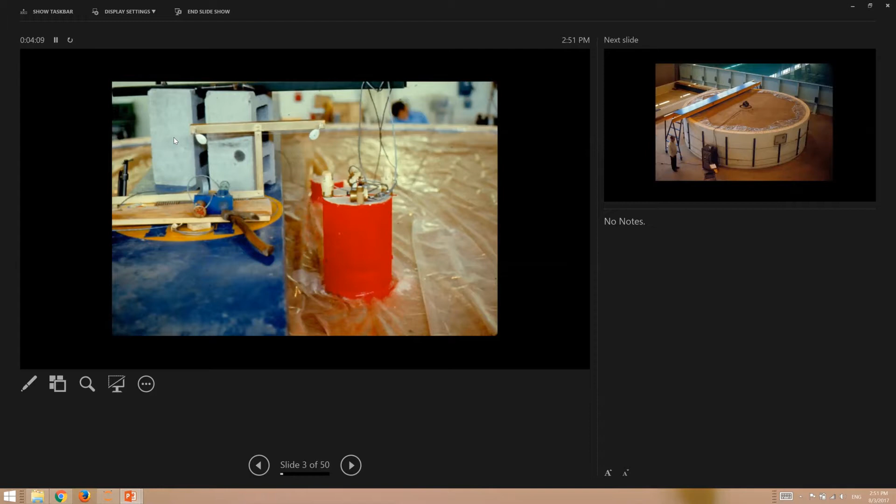So we'll start out with AREX. Stokoe now has T-Rex. This is Stokoe AREX. We have here a model footing, a very pretty model footing, by the way. Oh yes, of course, it's the wrong color - it's not blue and it's not burnt orange or whatever that ugly color is. In any case, there are instruments on here to measure motion.

But one of the ways of exciting is plucking, like you pluck a guitar. Well, this is an example of plucking. You can't see it, but there is fish line going up from the corner of this footing, upward over the pulleys, downward, and here is a weight hanging on that fish line. This is exciting. How do you pluck it? You hold this board up next to the fish line and you cut it with a hatchet. This is AREX, not T-Rex.

But it was effective. You pluck the footing, you find out what its basic mode of motion might be. This is the facility in which Stokoe was doing that work. It turns out that two of these facilities have grown after this one - one at Rutgers University and one at UMass.

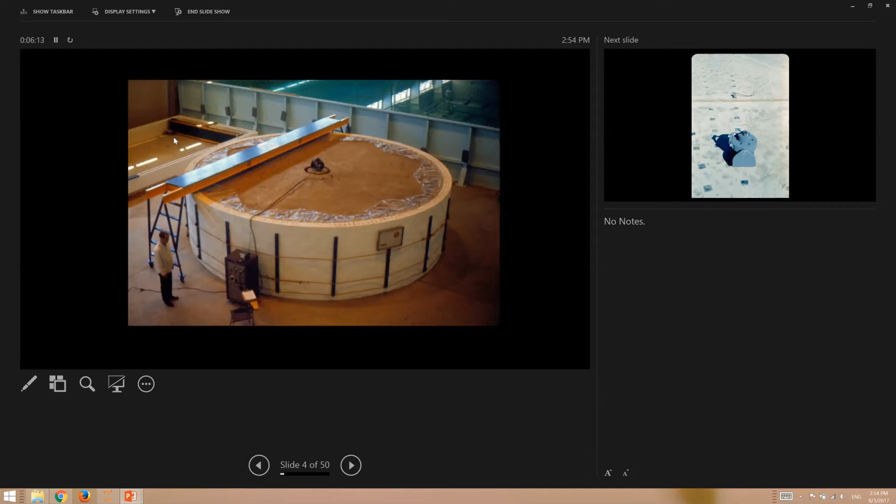Currently, the Michigan testing facility is in the floor, not above the floor, but at that time we couldn't win. In any case, here is our erstwhile investigator. This isn't his test, though - this is my thesis, and he was my laborer.

So exciting - plucking is one way. Steady state vibration: at the time that he and I were growing up at Michigan, this was all we had. It had about a 25-pound force capacity, and it allowed us to do linear testing, strictly linear. This happens to be a place where we're testing the impact, the effectiveness, of a trench as a barrier to vibrations. Okay, so plucking and steady state - they're essentially all we have when we get into the exciting business.

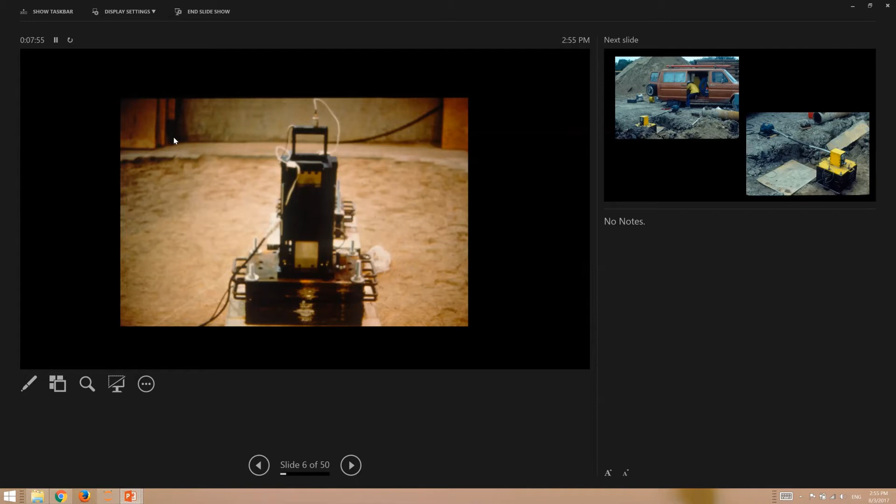Here is another exciter, like the electromagnetic. This is just an electric linear motor, one could say, and there is an armature in here that is forced to go up and down in this direction. But of course you can mount this device in a lot of different ways. In this particular case, it is exciting the vertical motion of a group of model piles in that experimental bin. You notice they've got a stack of plates on them - why do you do that? Well, you have to get the system into the frequency range of your exciter, and that's the only way you can do it. You've got to add mass to the top of the exciter.

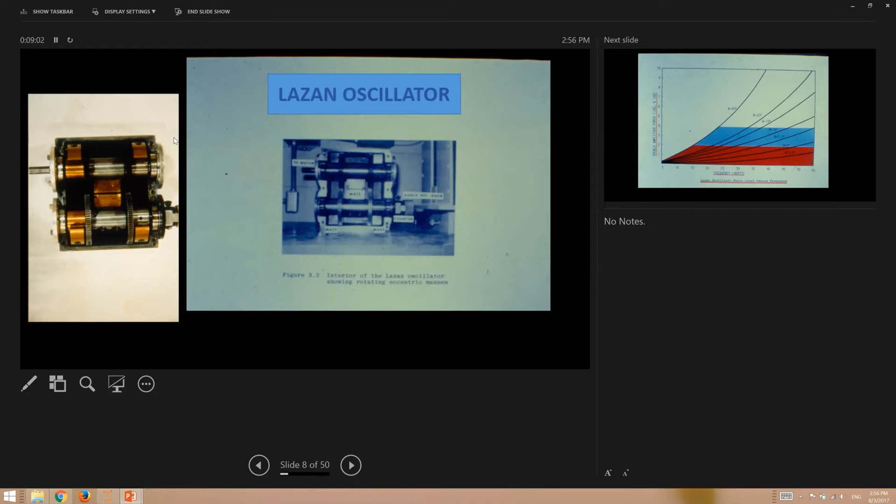Well, steady state - we can do steady state in some various ways. Of course hydraulic is one possibility, electromagnetic is another, and here is a mechanical approach. This is a Lazan oscillator, named for a mechanical engineer at University of Minnesota. It simply has a drive shaft, a DC motor, and the internals look like this. Here is the drive shaft, and these copper colored elements are eccentric masses mounted to these two shafts. The shafts are counter-rotating, so you can develop a force in one direction with rotating masses. This device, in a certain frequency range, could develop forces maybe 6,000 pounds at maximum, but nothing like the 50,000 pounds that we get with T-Rex.

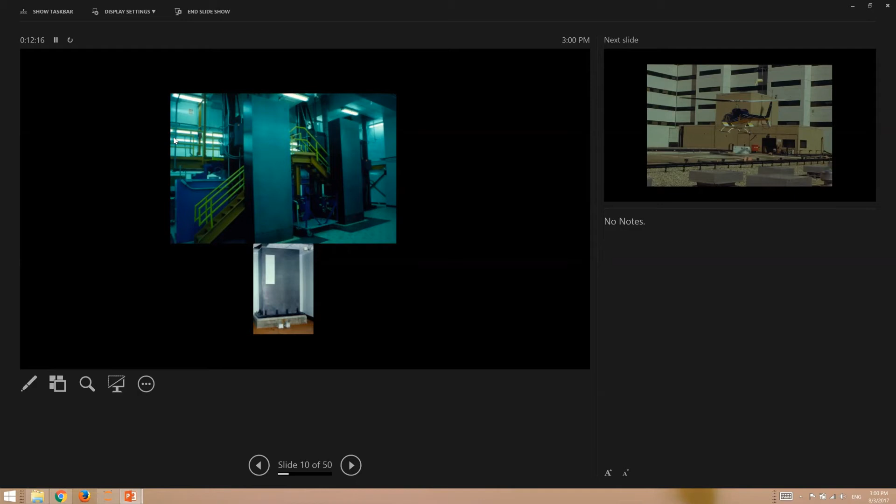Plucking. And it worked quite well.

How do you check out the roof? Well, there's a parapet along here, and my colleague and I, Larry Yadley, would jump off the parapet onto the roof. We plucked it, and we got the natural frequency.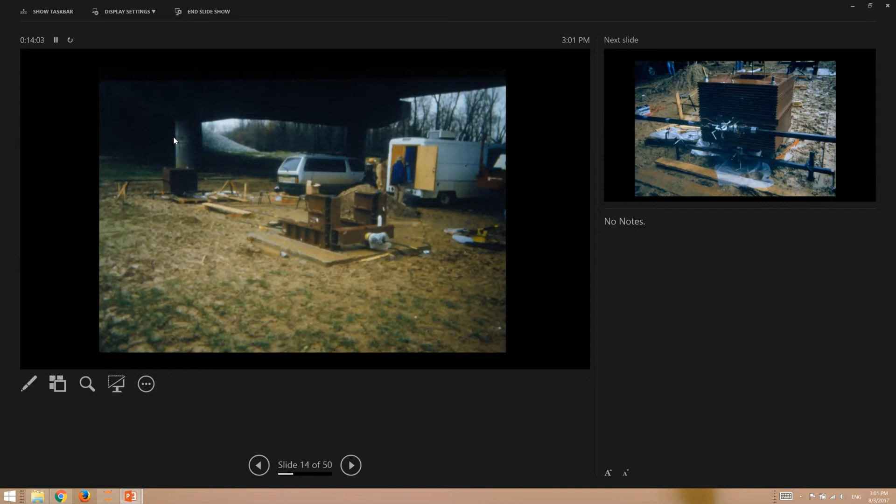Instrumentation on this side, not shown well. The pulling rod is over here, and there's a segment on the fixed side of the cable that is nylon rope with a force transducer in it. And we have to thank Professor Stokoe for the suggestion.

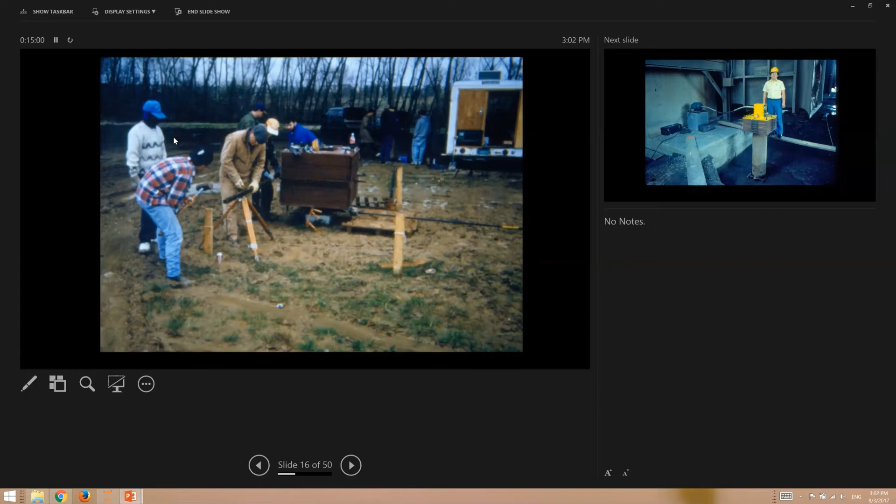It's out in here, and what do we do with it? Whoops, went too far. Anyway, we place a board on the ground. You see the cable is close to the ground. We went up a scale from a hatchet to an axe, and we would pluck the pile and it would vibrate.

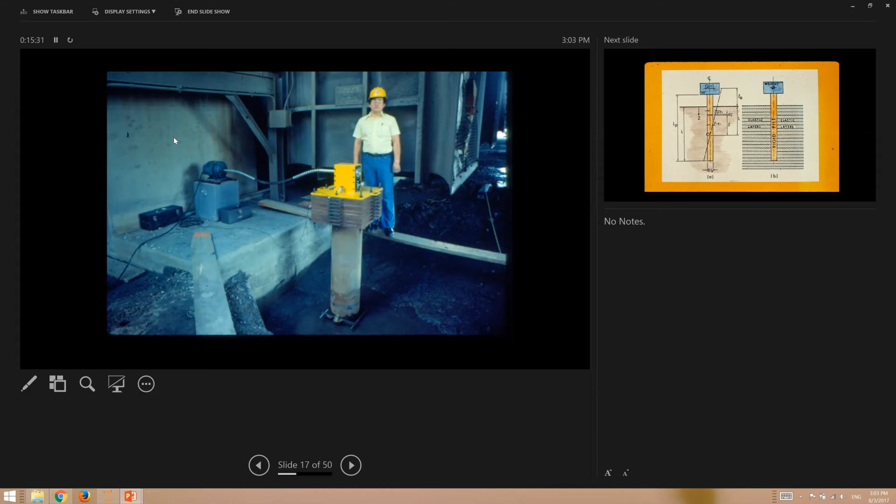The whole idea was, like this one, to excite it in a linear elastic mode. But here we have mounted the Lazan oscillator on top of the pile, and the motion of the oscillator will cause the pile to deflect in this direction. I don't have a movie for you. Where is that? Monroe Power Plant, Monroe, Michigan.

So this is the Lazan oscillator, steady state, and again we're trying to match measurements with predictions. Our prediction technique was based upon the Baranov elastic side layer theory. I think probably in this room, Professor Gucunski is most familiar with those programs. In any case, we were trying to compare with prediction.

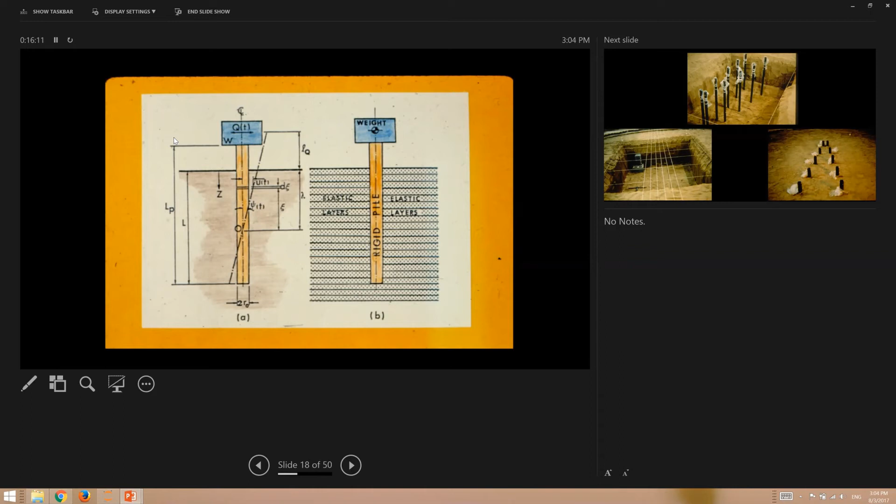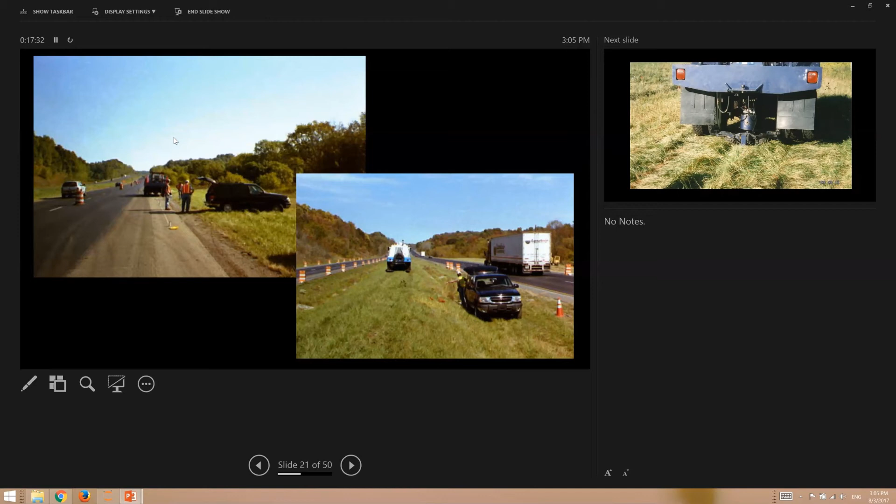Now, steady state excitation out in the field. We saw a multitude of different levels of force available in the Texas system. This is running SASW tests along the shoulder of Interstate 70 in southeast Ohio. Here is the vibrator, probably much like your thumper, 6,000 pound force capacity, something like that. But we were looking for old mines, coal mines in southeast Ohio.

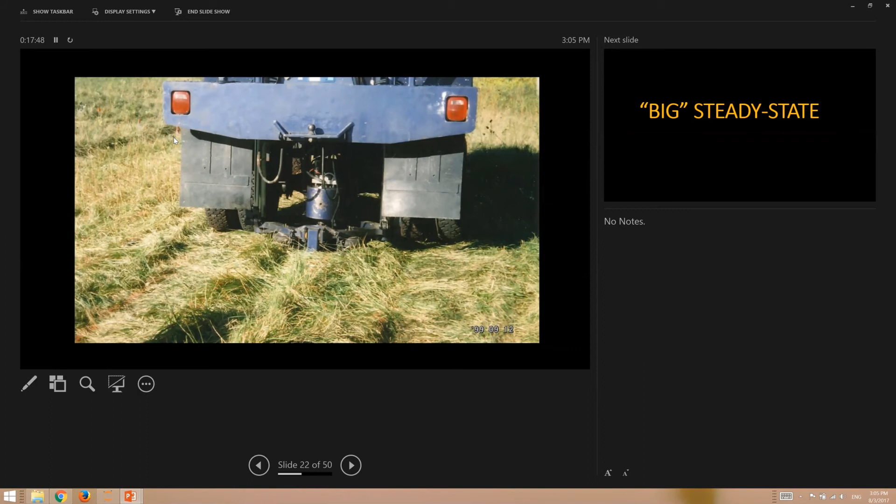Now, as I said, I have one big steady state example that goes beyond anything Stokoe has been able to show you. Is this the mother of all bombs? Is this what we're looking at here? Yeah, sort of. Okay, yeah.

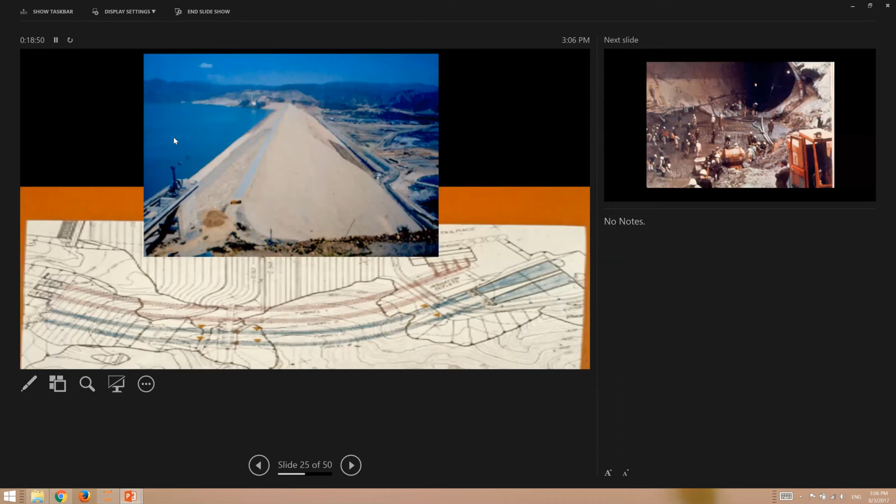This is the same dam looking from the other bank. On that bank, in the rock abutment, there are 4 tunnels. 2 of the tunnels are for generating electric power, going into the power plant. 2 of the tunnels are for irrigation.

Trouble is, there was a major catastrophe. If you were around in the mid-70s reading Engineering News Record, you read about it. But I don't see many of you here who were around at the time. In any case, Tunnel 2 at the upstream end collapsed, and there were a lot of reasons for that happening. The poor guy who allowed that to happen committed suicide. But in any case, this is what happened to Tunnel 2.

It was an issue of a temporary gate being jammed partway open, not fully open, not fully closed. And it created such turbulence that it destroyed Tunnel 2.

But that created an opportunity for measuring the natural frequency, first mode, upstream-downstream horizontal motion of this dam. There are at least 9 zones of soil and rock here. A group of our faculty at Michigan, Streeter, Wylie, Richart, and a couple of their grad students, modeled this dam, modeled this cross section with the method of characteristics, and did a pretty good job of it. In any case, they estimated that the natural frequency was about 1 hertz.

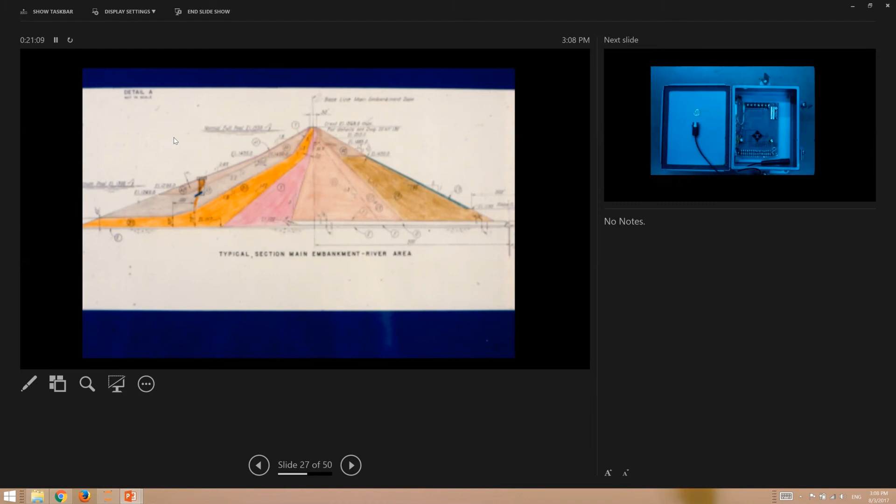Well, how do we excite the dam to find out if that's true, and excite it at different frequencies? Professor Streeter had the answer to that. Because when water is flowing in these tunnels, depending upon the elevation and the pressure at the upstream end, they will act like organ pipes. First mode looks like that. And even with the water flowing, there is still the organ pipe motion. How do we know?

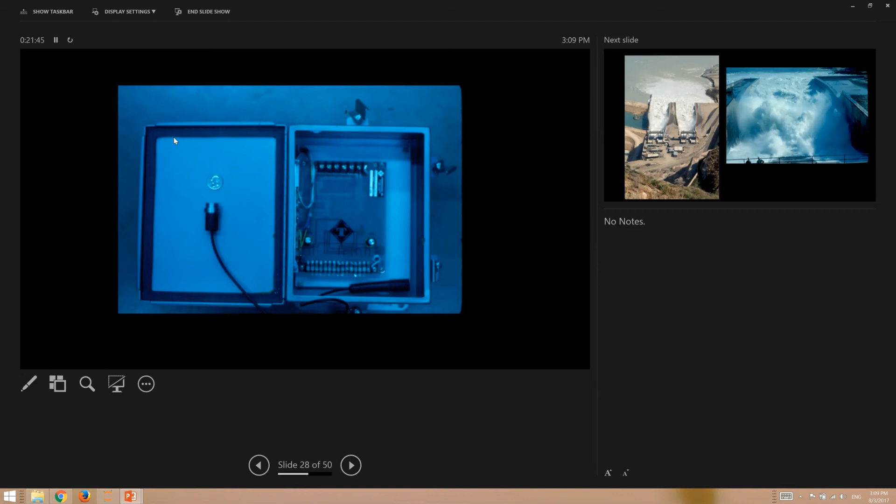Well, we installed accelerometers. I neglected to mention, when I showed you the 4 tunnels, there are locations of 8 transducers. We installed these to measure frequency. The transducers, the accelerometers, were in these 2 tunnels, which allowed water to flow for irrigation purposes.

The total water coming out of these 2 tunnels in these 2 pictures is about the same as the water in the Detroit River passing Detroit at one time. It's 125 miles an hour in these tunnels. And the hydraulic head here, where the fast water meets the stilling basin water, is 100 feet.

Well, so we installed pedestals. These pedestals were there for light posts later on. Anyway, pedestals both at the crest and at the toe of the dam to measure the vertical and upstream-downstream motion of the dam. We located them at the 1/3 point and the 2/3 point, 2 places along the length of the dam. So at the crest and at the toe, looking for the magnification.

And the question was, can we control the elevation? The only time we could do that was when they were repairing Tunnel 2, which was destroyed in the accident. So we started out with a reservoir elevation at about 15, 20, something like that, in feet. And then as we let the water flow out of tunnels 3 and 4, the elevation dropped.

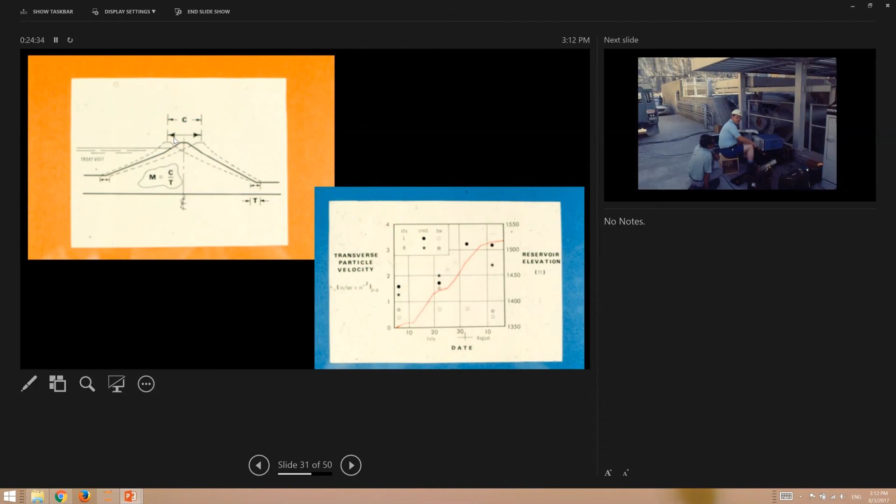Yeah, I was there. I was making the measurements. Now, sometimes we have unintended steady state. And how might that be?